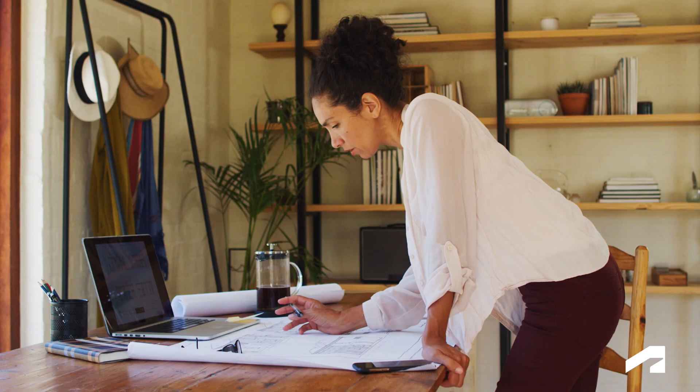If we look at the state of the AEC industry today, it has drastically changed in recent years. We're seeing digital transformations positively influence the decisions being made across all aspects of our customers' businesses. Just over the last year and a half, online and virtual collaborative environments have become absolutely critical for planners, designers, contractors, and also owner organizations.

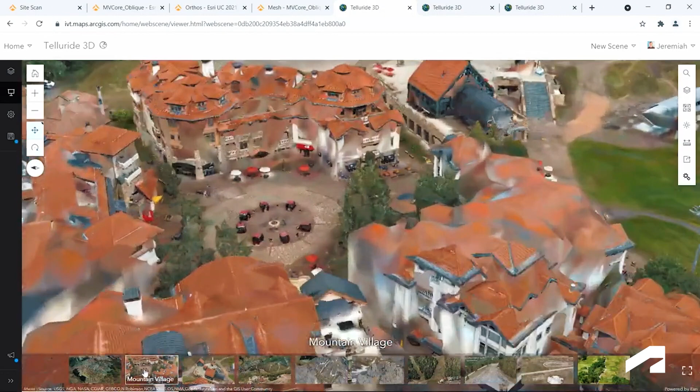Yet despite this shift through technology, connected workflows between design and geospatial teams has remained elusive. This is important because we've seen more and more organizations seek to blend design data with a geospatial context to gather a better opinion and understanding of the natural and built environment.

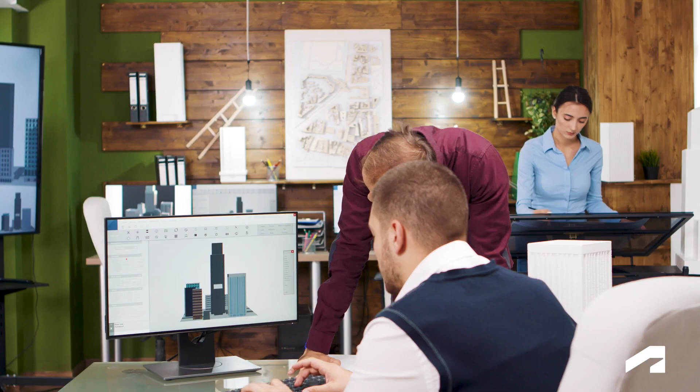In fact, we ran a survey with Autodesk customers and found that 93% wanted GIS data integrated into their design tools. And in fact, 83% said that GIS data was fundamentally important to the work they do. And yet, only 20% felt that the integrations available today were easy to adopt and use.

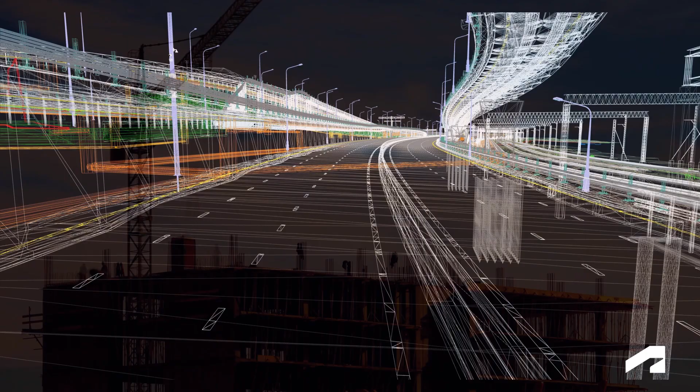There are several macro trends that are impacting the world around us that the industry must respond to. Take, for example, a building or road, perhaps a railway station or residential development. Understanding vital projects like these within their larger contextual environment is really important.

It helps us improve the way we plan, design, build, and maintain assets with consideration for the real world around them. This is absolutely key for successfully tackling global trends such as population growth, water scarcity, and climate change through more resilient and sustainable approaches.

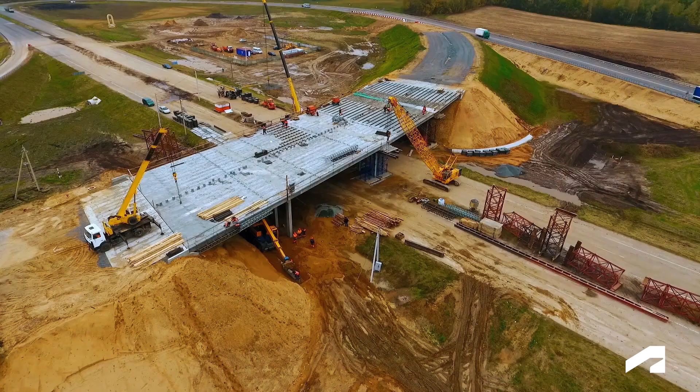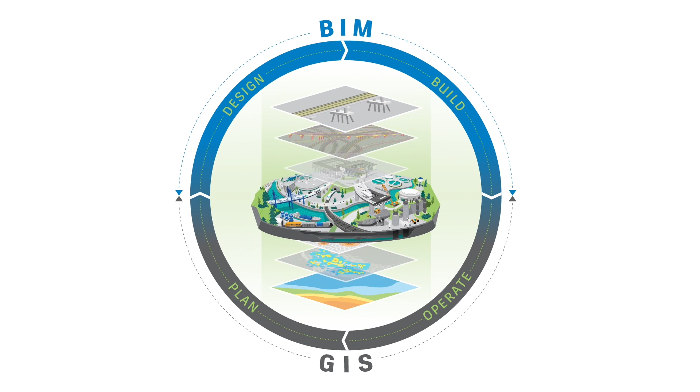The Autodesk and Esri partnership is a compelling event that focuses the industry on how we can address these global challenges together. Our intent is to reduce the inefficiencies in how BIM and GIS information is exchanged by creating frictionless, live and native data flow between engineering and GIS platforms.

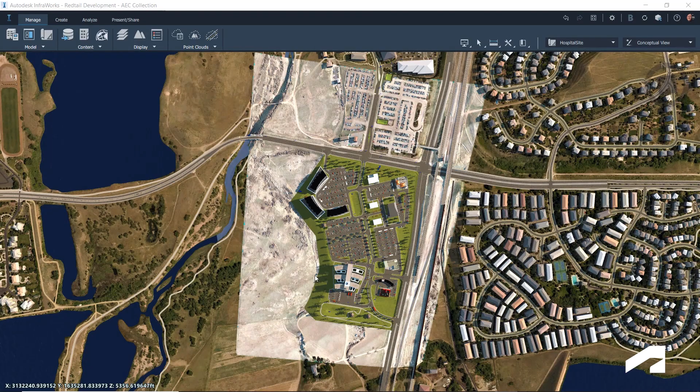The streamlined flow of information enables teams with specialized and unique skills to make better decisions from planning, construction and operations. The first integration through the partnership was functionality built into InfraWorks, an Autodesk civil design desktop product. That capability was called the Autodesk Connector for ArcGIS for InfraWorks.

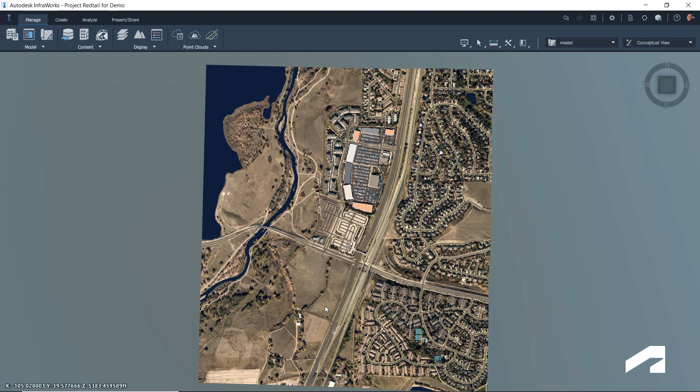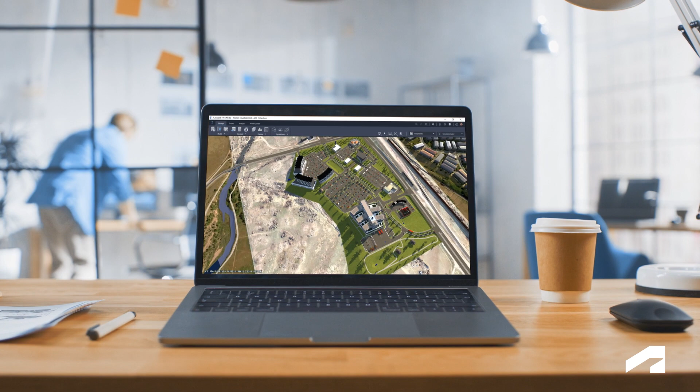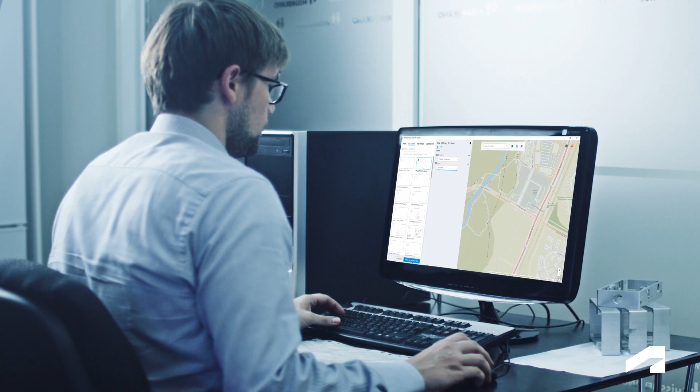InfraWorks is a visually immersive environment where designers can create conceptual design in the context of what exists, helping them make better decisions based on the impact their plans may have on existing infrastructure, such as underground utilities. With the connector in InfraWorks, a designer can connect to historic underground utilities GIS data directly in ArcGIS and add that information right into their InfraWorks model.

With design and GIS data combined, the designer can then examine all utility assets and their associated properties. If there are any questions about the completeness of the information they have, designers can request a field team to go out to validate that information.

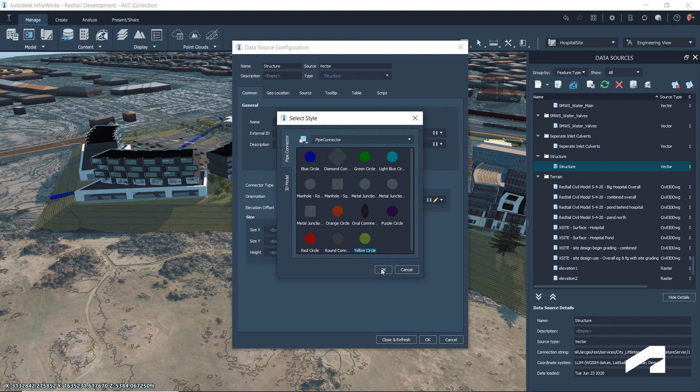The field team can connect to the same information the designer has access to and update new information to the feature layer while in the field. Instead of having to request for a new shapefile, designers simply refresh their model in InfraWorks. And since the connection to the GIS data is live, the new information is directly reflected in the model, allowing users to identify potential conflicts and quickly resolve it.

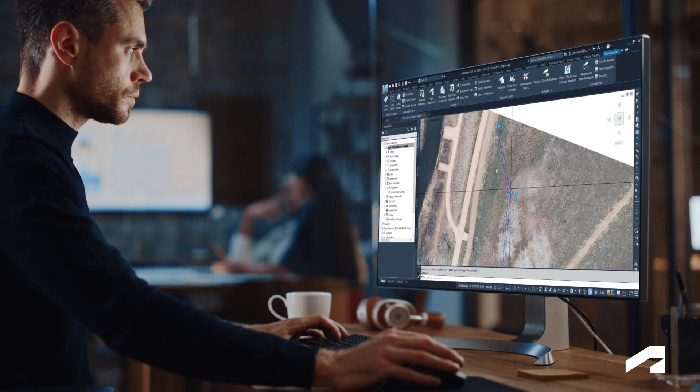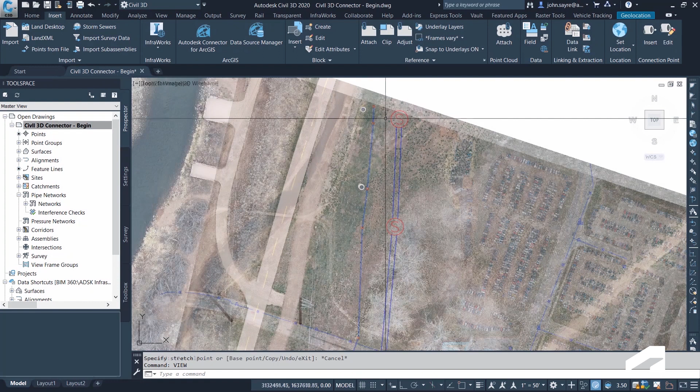The next product integration was between Civil 3D and ArcGIS. In Civil 3D, ArcGIS features are saved as Civil 3D objects, including the ability to create pipe networks from the different parts coming in from ArcGIS, saving users valuable design time.

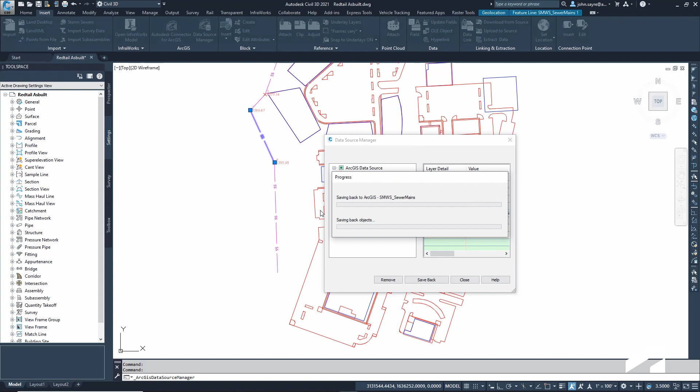The connector for ArcGIS capabilities added to InfraWorks and Civil 3D provide a compelling value to designers. No other civil design authoring software has the ability to connect directly to GIS data and analyze results. These integrations enable a new way of working that allows cross-functional teams to streamline the data flow between two different systems, resulting in better collaboration and decision-making throughout the lifecycle of a project.

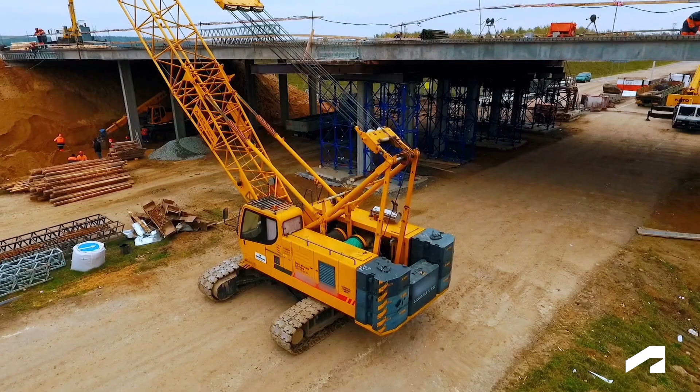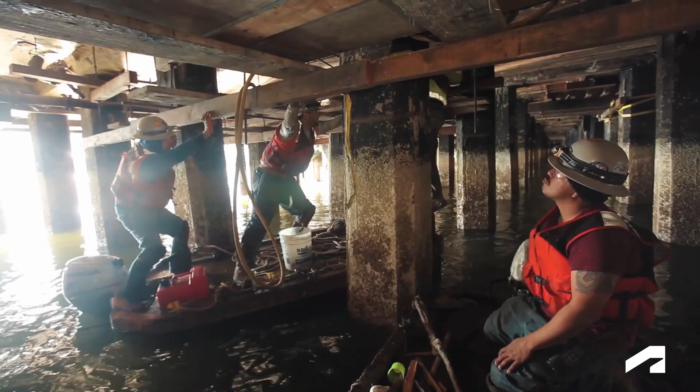Now, imagine the value that could be gained with the ability to use BIM data, documentation, and respective geospatial location and condition in real time across all phases of an asset's lifecycle. The latest effort in our partnership with Esri does just that, with the establishment of a cloud-to-cloud connection between ArcGIS and the Autodesk Construction Cloud.

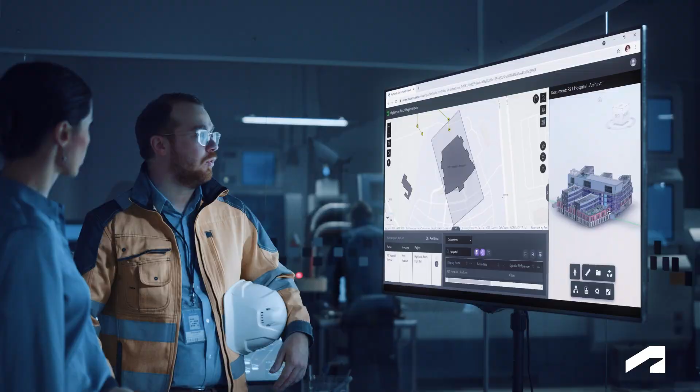Cloud-based BIM and GIS collaboration provides owners, project managers, designers, engineers, contractors, and maintenance and operations professionals with easy and immediate access to project information that is integrated with geospatial context, reducing the need for data conversion and offering more secure connections between disparate systems.

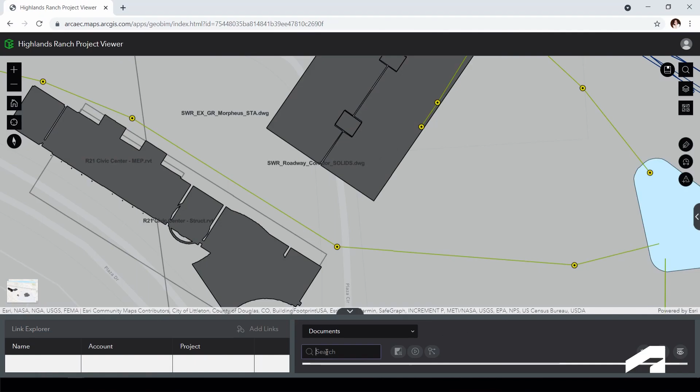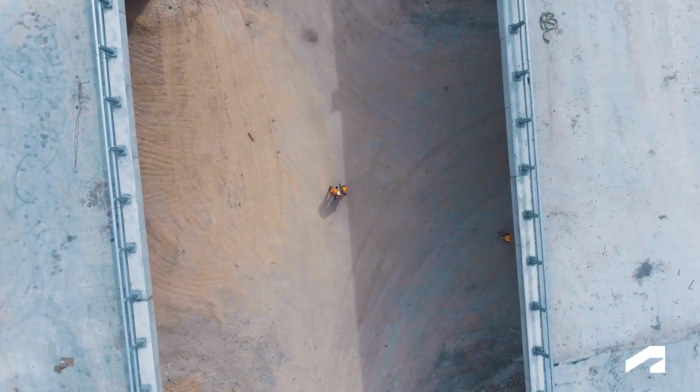And with the launch of ArcGIS GeoBIM, we've brought a new joint offering to market that includes ArcGIS GeoBIM and Autodesk BIM Collaborate Pro. Utilizing ArcGIS GeoBIM and BIM Collaborate Pro together, AEC professionals can deliver web applications to explore and collaborate on integrated design and GIS information configured to their needs, easing communications and improving decisions during planning, design, construction, and operations.

BIM and GIS cloud collaboration with ArcGIS GeoBIM and BIM Collaborate Pro unites multidisciplinary teams and places data at the center of everything they do, enabling project owners and AEC design teams to better manage risks, costs, and timelines.

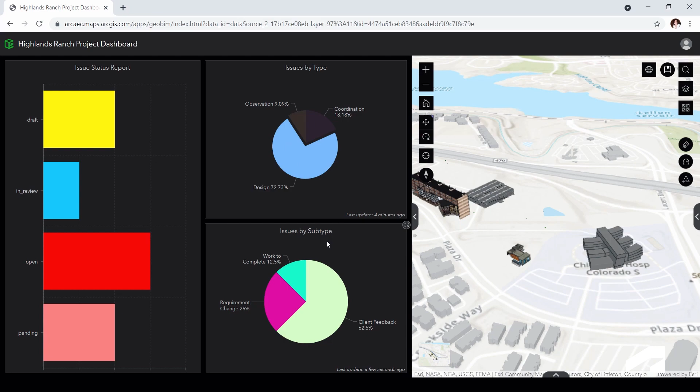The commitment of our alliance with Esri is to build robust solutions and support workflows that help remove the silos between GIS and AEC designers and owners. By creating more connected workflows across all project stakeholders, we can make it easier to build a better, more sustainable future for all.